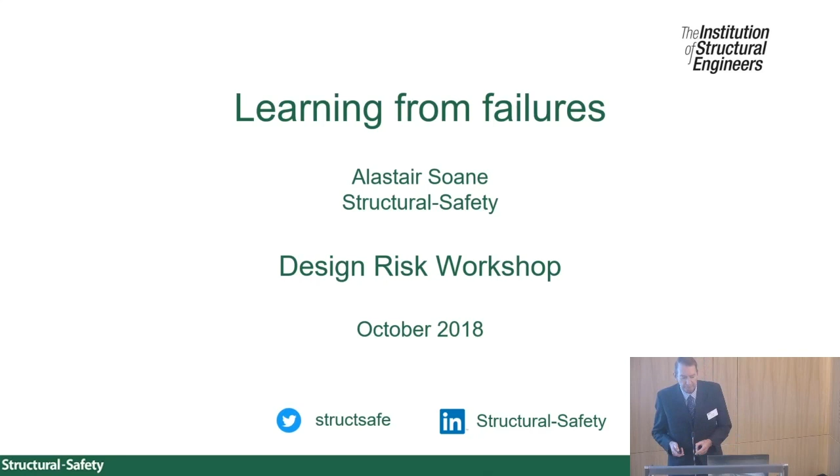We have three sponsors, who provide us with funds and guide what we do. Principal amongst those is this institution—they've always been very keen on safety. Second are the Institution of Civil Engineers, coming more into prominence post-Grenfell because of infrastructure concerns. And then, of course, HSE, which is absolutely fundamental to safety in general, and is the third leg of our sponsor. So we've got a very stable three-legged stool.

And that is the group. Just a minute, I've got the hang of this.

Underneath that comes structural safety, which is just a name, but the two bodies which really count are SCOSS and CROSS.

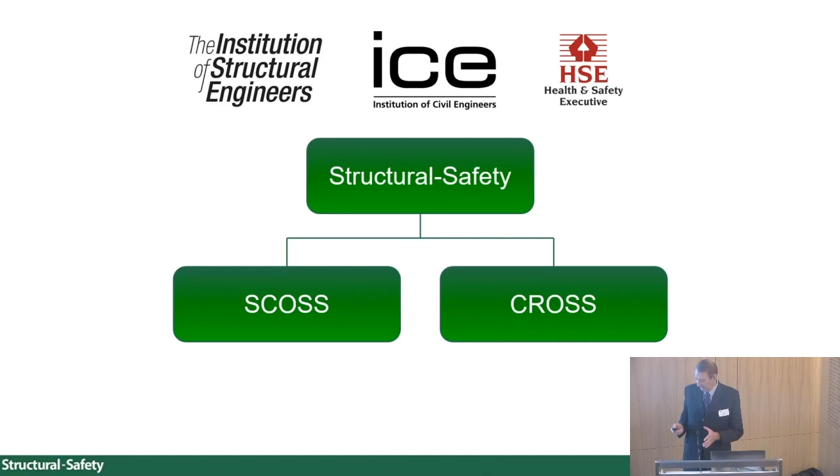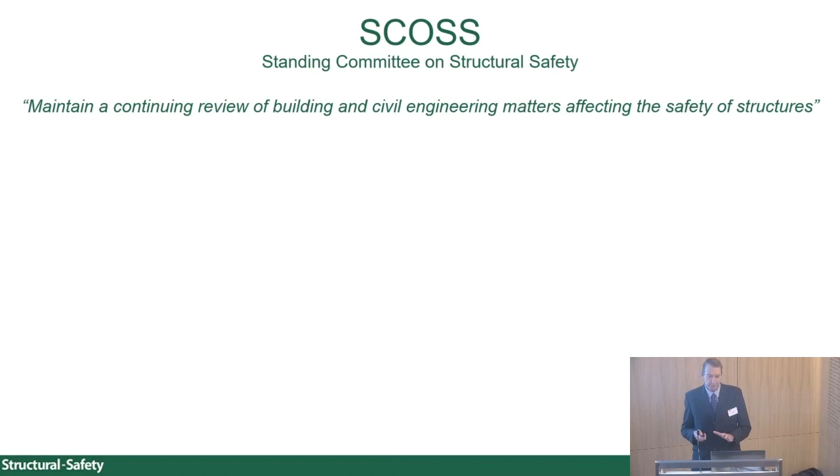SCOSS is the Standing Committee on Structural Safety. It's been going for over 40 years, started because of various disasters, including Ronan Point, a building which collapsed due to a small explosion, and bridges which failed as well. So SCOSS was brought into existence to collect data from public sources, because at that time there weren't internets, there wasn't immediate access to information, so you had to wait until something was publicised.

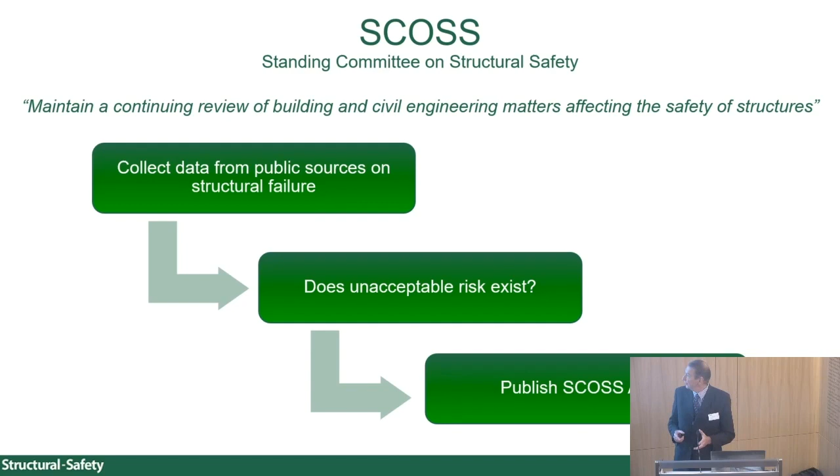SCOSS then considered, is there an unacceptable risk? Their duty at that time was to report it to the President of the Institution of Structural Engineers and the President of the Institution of Civil Engineers. Then, if it was decided there was a risk, an alert was published and went round industry. We still do that, and that's still important.

Here are some of the recent alerts we've published. This one on the left we'll come to again—fire in multi-storey car parks, when there was a huge fire in a Liverpool car park that destroyed 1,300 vehicles. A very important issue, and we'll come to why later.

Then there was a steel frame which collapsed in London. This was a building ready to be completed—it had been topped out, and minutes after 40 people left the site, it collapsed totally. So it was a near miss for 40 people. However, the building was intended for religious purposes, and the ground floor was going to be a hall, a congregation area where up to 1,000 people could have gathered. So it was possibly a near miss for something like that.

In order to create this big space at the bottom, they wanted no columns, so there was a huge girder at the top spanning right across, and the other floors were hanging from it. The reasons it collapsed are not entirely certain because the exact trigger wasn't found, but there were a lot of construction defects and issues, given in our alert, published in February last year.

Then there was the business of the Edinburgh schools, where a number of schools were found to have issues. It all started off with this school here. I'm trying to get a red button and I can't seem to—it's just below the two arrows. There's a red... oh yeah, right, thank you very much.

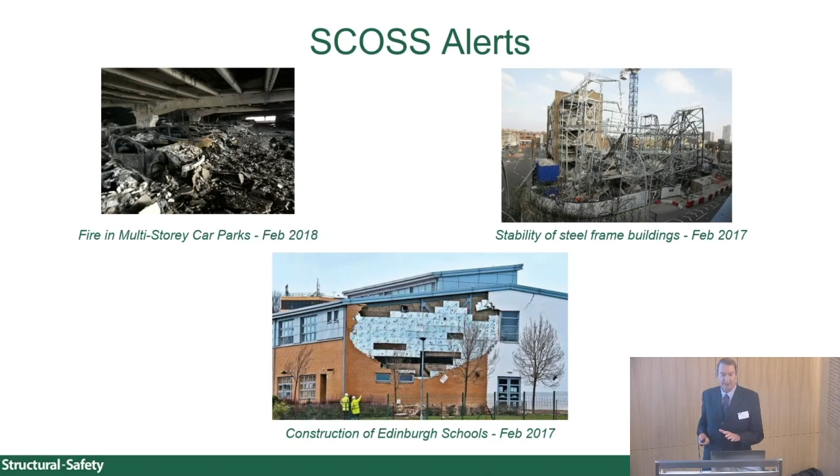The defects which were discovered were found to be endemic and covered a lot of schools, and you will find the details of that in the SCOSS alert. So we publish stuff very relevantly, and even in this day and age, in a highly regulated country, a highly regulated engineering community, we still get issues like this.

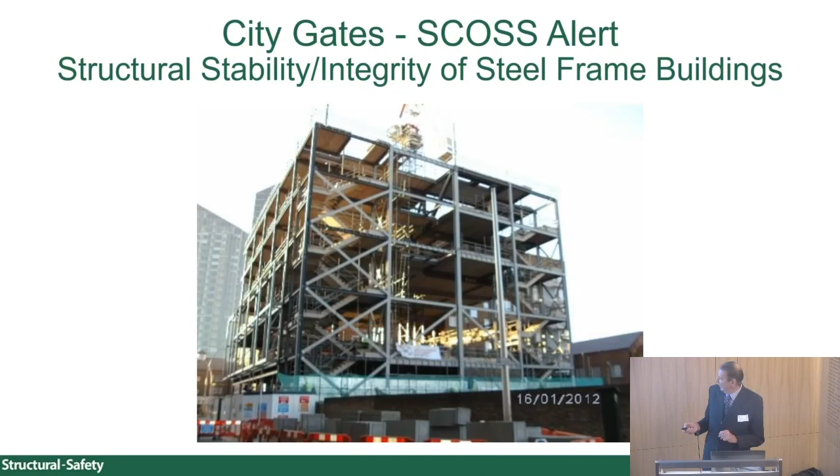So there's a little bit more about the City Gates building, photographed just after the topping out ceremony, and that's what it looked like afterwards. So a catastrophic sudden collapse.

And here are a couple of the reasons for it. One, if you imagine this being upside down, there should have been a hanger welded on, but obviously the welding didn't take at all, so the hanger just fell off.

This is part of a tensioned connection, and so there was a piece of steel coming down, another one coming up. The two should have married up, and bolts should have gone through the holes. They didn't marry up at all, so more holes were drilled in order to make it work. So you had what was in effect the edge of a postage stamp, which just sheared.

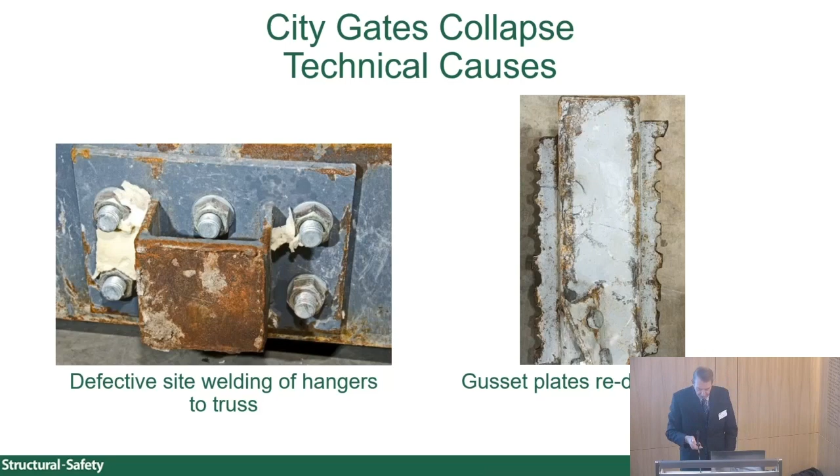So these are issues related to the fabrication of the steelwork.

So what we do is we try and learn lessons from these things. And there are various lessons here. For example, a local failure shouldn't cause a disproportionate collapse, which is an inherent part of robustness.

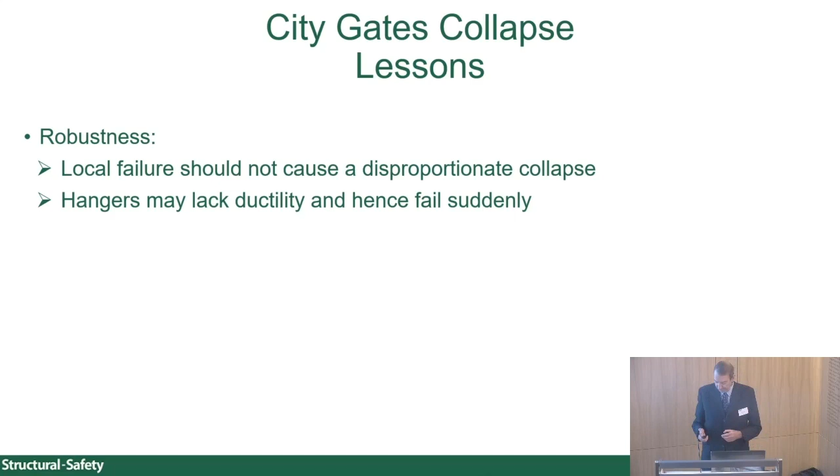Hangers are something which don't have much ductility. And if you're trying to avoid sudden collapse, you want to have as much ductility in your system as possible. You want it to kind of yield a bit. It can sag, but it shouldn't fall down. And this is a key point in earthquake engineering.

And connections, of course, are vitally important. And you should worry, for example, about welding vital connections on site. And you should obviously not amend a connector, such as drilling extra holes, until you've talked it through with the designer. I'm sure none of you do those things, but it did happen.

And the contractor should always be aware of the risks of an unusual structure. So if you've got something which is not run-of-the-mill, the contractor must be made aware, and everybody concerned, that this is a structure which has got special requirements.

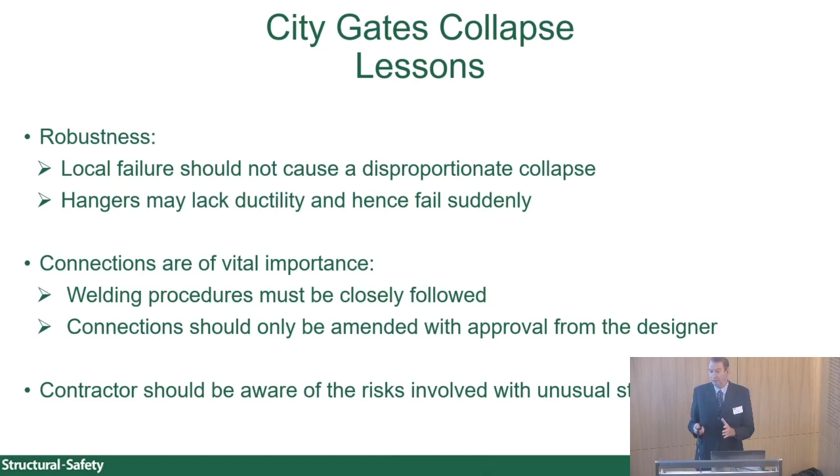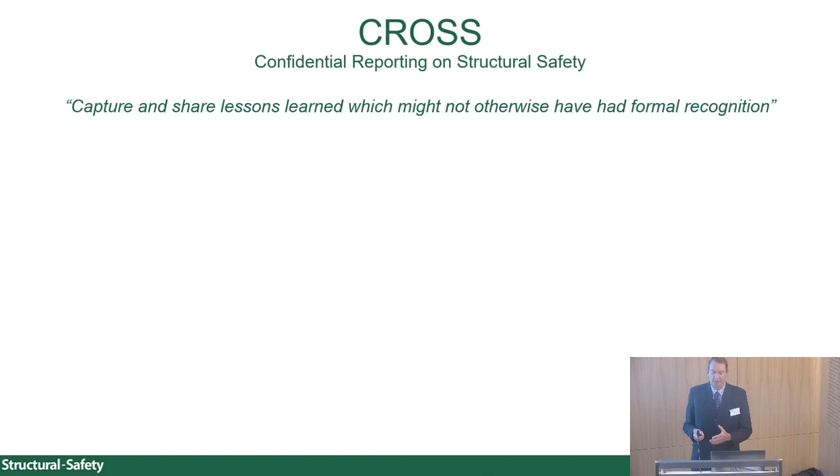So we now move to what does CROSS do, and Faith was very instrumental in this a few years ago, in deciding that there were lots and lots of events which happened but which never got reported. They weren't published for various reasons, and yet lessons could be learned from them if we could find a way of gathering that information and learning from it and disseminating it.

Now here is the process that we use, and we copied a lot of this from NASA, because 40-odd years ago there were a lot of aviation crashes in America. Pilots would come down and say, well, I had a near miss there, and the first thing their employer would do was say, okay, you're fired. So the Federal Aviation Administration, who were in charge of all this, decided that they needed a confidential reporting system.

A no-blame system. And in fact, in America, if you're in the aviation business and you report something and it's not criminal, you will never be prosecuted for that. So that's a kind of get-out-of-jail-free card. We don't have that here. But we do and have always worked alongside NASA to make sure that our processes and theirs are the same.

So a report is received. It only comes to me and our senior engineer called Paul McNulty. We're the only ones who ever see a report. And we've both got very bad memories, so after a while we never realise who it's come from. Because although we need a name in the report, we don't actually use that name ever. We simply may want to phone somebody or email them and check a few details, but in due course, that name is shredded from our system.

The report is then processed to produce an anonymised technical issue which doesn't mention sites or products or names of contractors or clients.

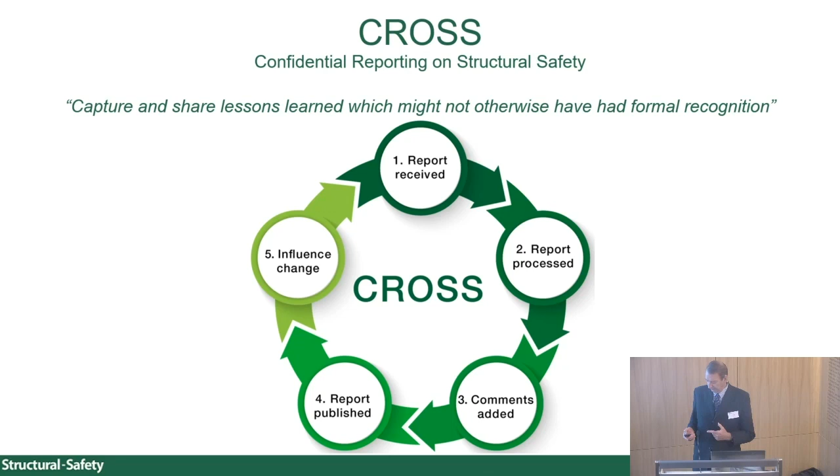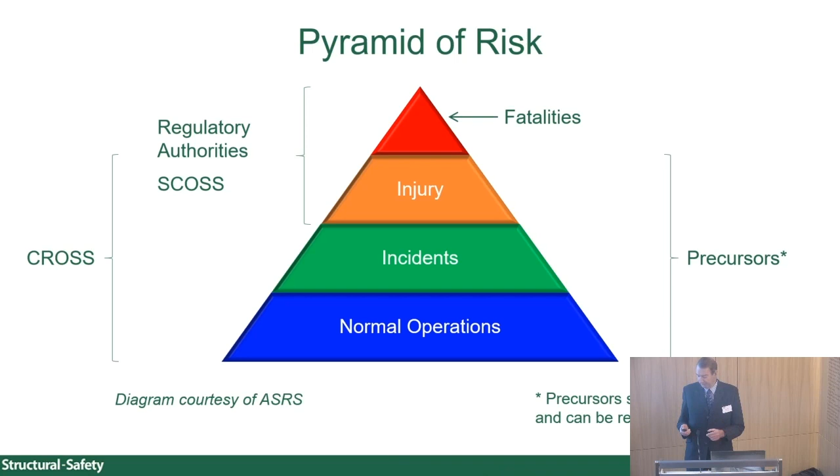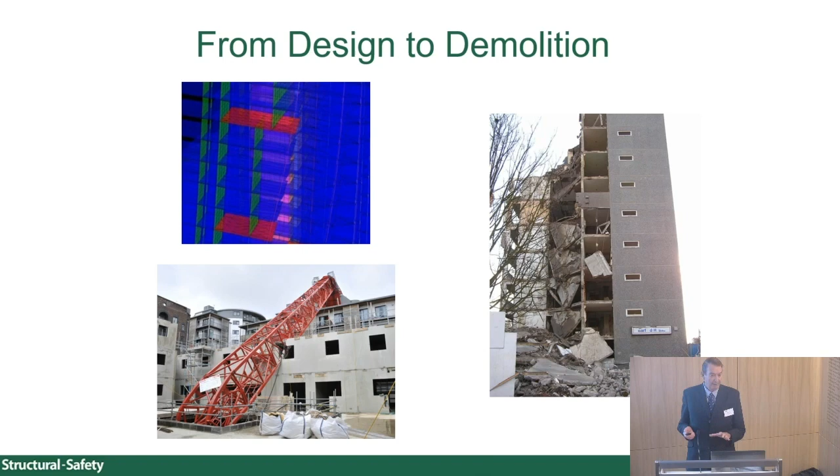Large panel structures are in the news again, being looked at post-Grenfell. So what sort of causes do we get?

We analyse our reports and give them a primary cause. This is, in a sense, simplistic because all failures have multiple causes, but there's usually a prime cause.

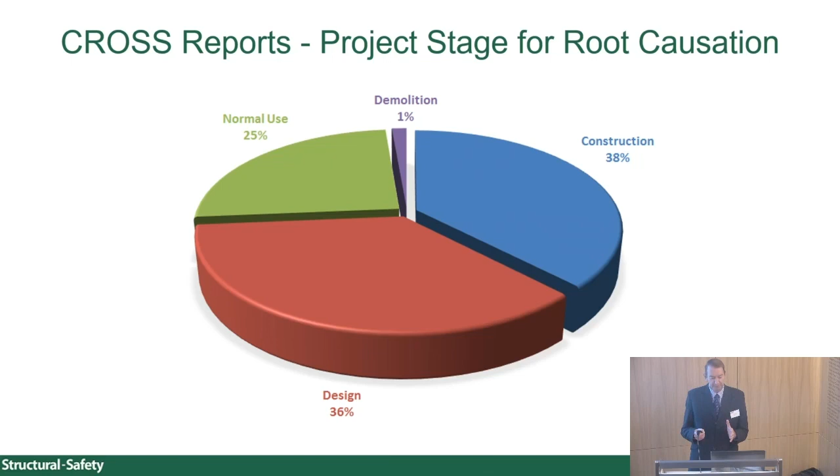There's not so many of those, but we think that's because not so many engineers are involved in the life cycle of a building. Once the construction is complete, they generally go out. So there are probably more failures in the green sector, but we don't record those.

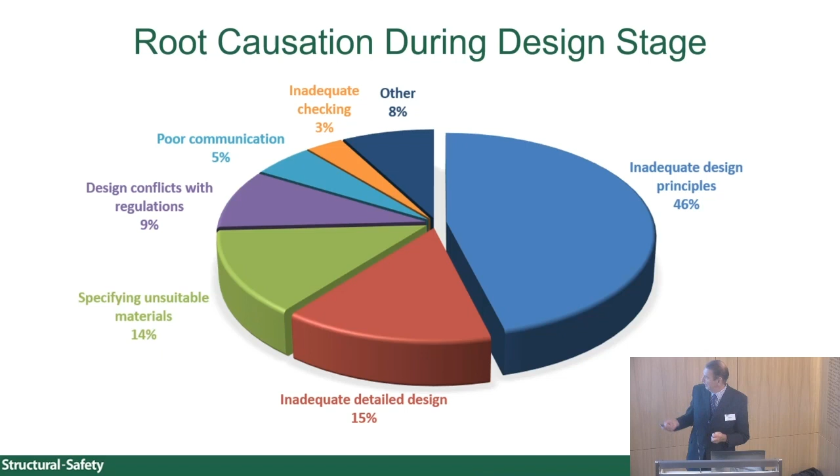We then analyse what happens in the design stage, and we find the biggest sector is inadequate design principles - people who are either not aware of or haven't thought of fundamental principles. Then there are other issues to do with inadequate design, inadequate checking, and communication and so forth.

During construction we can divide that up, and the biggest sectors are inadequate competency and inadequate site supervision. So the human factor accounts for 50% of all the issues which happen on site that get reported to us. I stress this is not necessarily a complete picture - it is what we see.

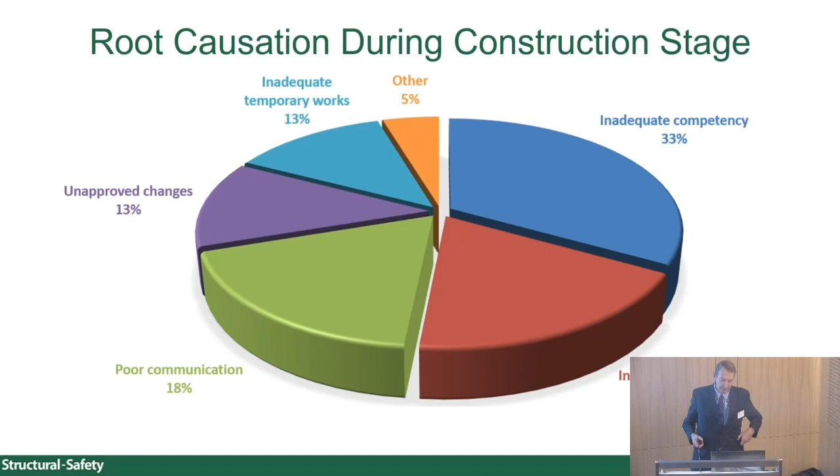So here is an example of looking at precursors - these are anchor failures. About 15% of our reports are to do with anchors and fixings.

They are often neglected. The designer will say connect X to Y, and it's left to somebody much further down the chain to decide we'll buy a fixing, and often somebody doing a bit of value engineering will say there's a cheaper fixing available down the road, get that one.

The picture on the right is of a ceiling which collapsed, and I always look up at heavy ceilings. This was in a cinema for heavy acoustic insulation - 50 or 60 mil of plasterboard, with speakers, lights and various bits of gear up there. Yet the fixings which failed, these skinny bits of wire, were the kind of thing you would put a very light suspended ceiling up with. So no thought was given to what was going to hold that ceiling up.

No casualties, fortunately. This is an example - you can see all these bolts going in at skewed angles. These were bolts holding angles, and the angles were holding up the precast stairs in a multi-storey block of apartments.

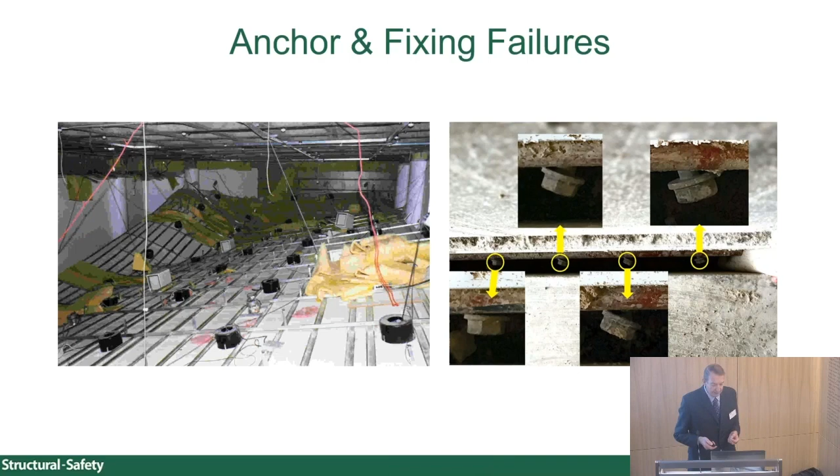Putting the bolts in meant they had to avoid the rebar, but they couldn't avoid the rebar. They put the bolts in any old how, and the result was like that. So again, it was a near miss, because nothing happened.

But here are some examples of failures where chemical anchors have caused near catastrophes. The one at Balcombe Tunnel, the Victorian tunnel, has steelwork above which is part of the electrification system. It's ancient brickwork, but still trains go through there on the way from London to Brighton at 100 miles an hour. You can't really see it, but that steel platform is sagging because the bolts holding it up, which were into the masonry, have fallen out.

They've been falling out for years. Inspectors have been going along, looking at the tracks and kicking these things, saying 'oh, there's another bolt, I wonder where that came from,' and never looking up. So that was a near miss.

One which wasn't a near miss was Boston, where heavy ceiling panels connected by epoxy bolts to the tunnel roof collapsed. There were fatalities, and that became known as the dollar anchor, which caused the billion dollar claim.

Huge problem. Then in Japan, a very similar thing, the Sasago Tunnel, where there were concrete components forming a flat roof and air ducts above them. That collapsed because the bolts were inadequate - they had never been inspected, never been checked. In that case the collapsing panels caused a fire, and quite a number of deaths followed.

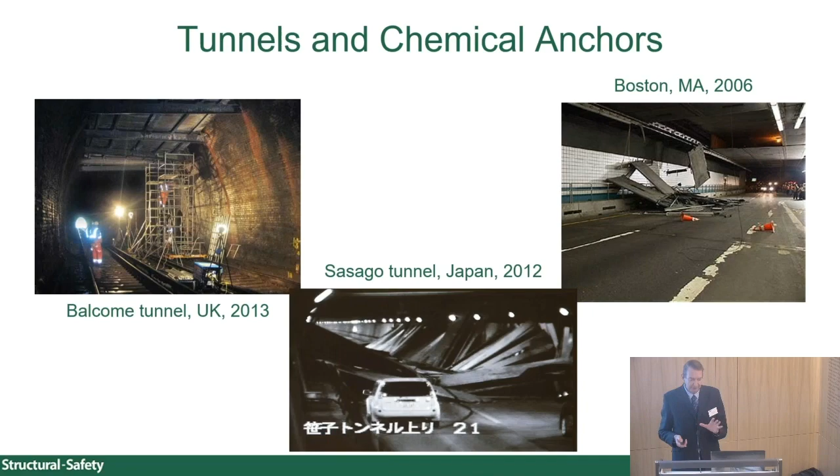So a simple thing like a fixing - and if you can find the precursors, you may be able to do something.

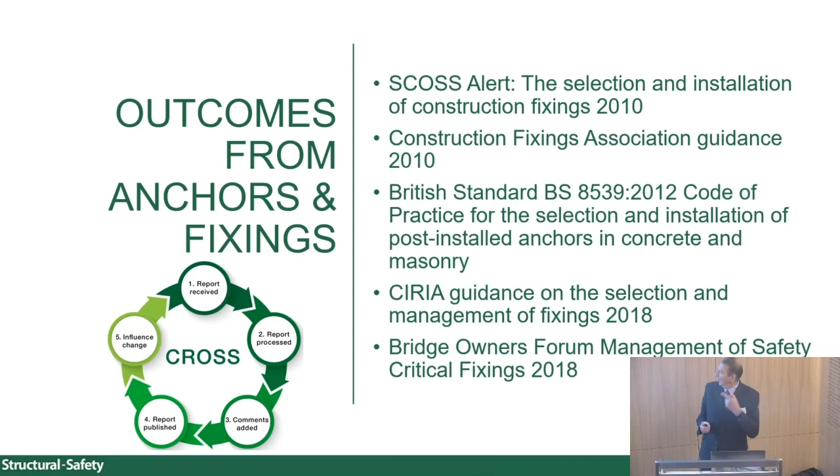So here's what we were able to do. We published an alert back in 2010 about these things, and published guidance along with the Construction Fixings Association, the trade body looking at fixings generally. The British Standard Code of Practice was changed using our material. Then this year, CIRIA have published new guidance, and the Bridge Owners Forum have published new guidance for all the fixings related to major bridges. So our virtuous circle has been completed.

Here's another issue which is relatively common: balcony failures. That is a building with balconies at 2 levels. The higher level balcony has just fallen on the lower level, been there for 40 years, and the rebar was found to be in the bottom of the slab, not in the top. So people have been walking on this quite happily as a cantilever which was completely unsound.

The photograph in the middle I can't show you for legal reasons, but it's a very similar case in France recently where 6 people were killed when a balcony fell down due to the rebar being in the wrong face.

And then this is one in Berkeley, California. That's timber which sticks out, and there was a party being held on a balcony at a student residence, and that came down, and 6 students were killed in that. So just simple balconies can create problems.

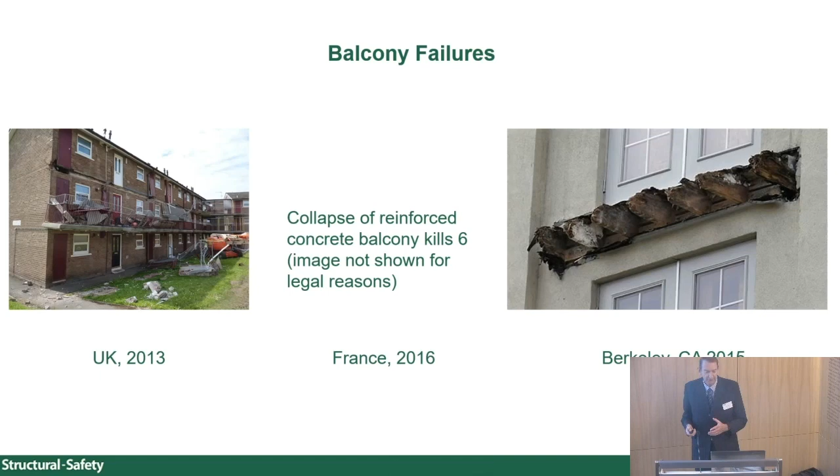So what are we doing here? We've had 21 reports, which is a significant-ish number. We're preparing a report. There is a committee, British Standard Committee, looking at balconies now, so that has been submitted to them as evidence, and we'll see what happens.

Temporary stages. The one over here is a small stage for a small event, and it's got a roof which is fairly simple, but it's got some mass to it. It's got some very heavy speakers in the corners. So in earthquake terms, it's an inverted pendulum. All the mass is at the top, and all that's holding it up are scaffold tubes at each corner.

So the reporter who sent that in said, well, I'm a bit worried about this. What's holding it together? The one on the right came from another reporter at about the same time, but coincidence.

And that was somebody who had been checking a temporary stage at a site for a concert and found that the corners of the top of the stage were connected to the ground by strops, and at the ground were large water tanks. So the idea was these water tanks would act as kentledge, and if there was any swaying of the temporary stage, then these water tanks would stop it. But their concern was, well, water's not very good - what if somebody just opens the tap, for example?

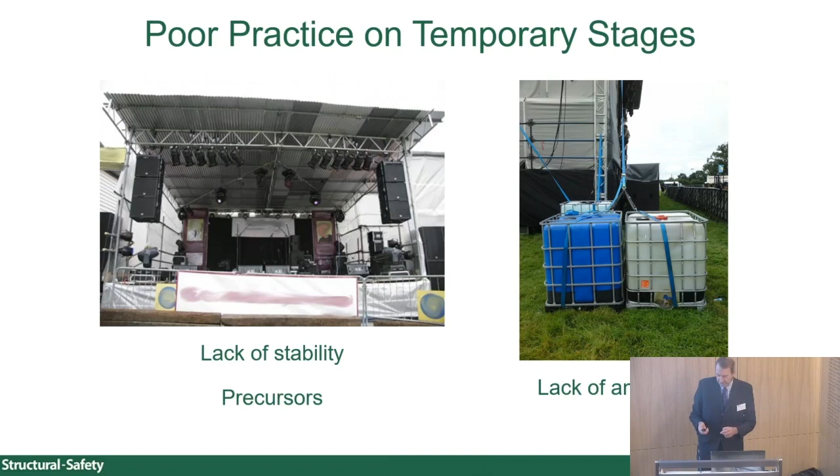So I wouldn't imagine people in Indiana would be reading SCOSS Alerts from earlier, or SCOSS reports. If they had, somebody might have thought more deeply about this.

So what are the outcomes from temporary stages? We published an alert. That alert was used in the London Olympics, where there were more temporary seats than permanent seats, so all of those were checked in accordance with the principles that we had proposed. And finally, guidance from the institution has been updated in 2017 on the procurement, design and use of temporary stands. So again, we have completed our virtuous circle.

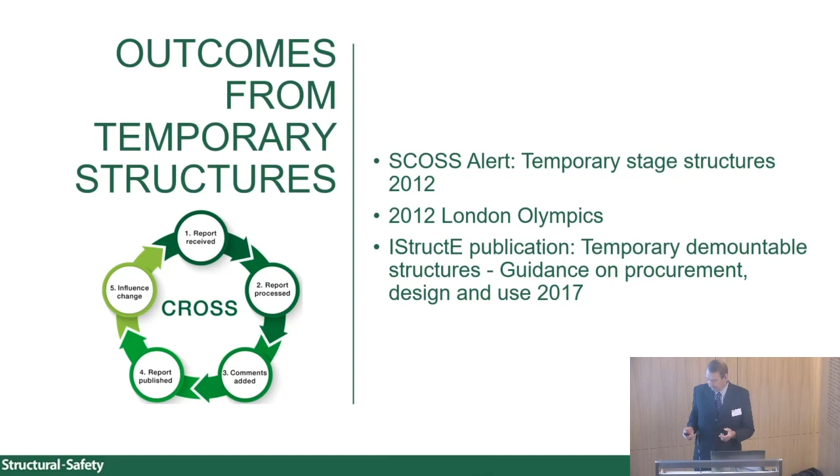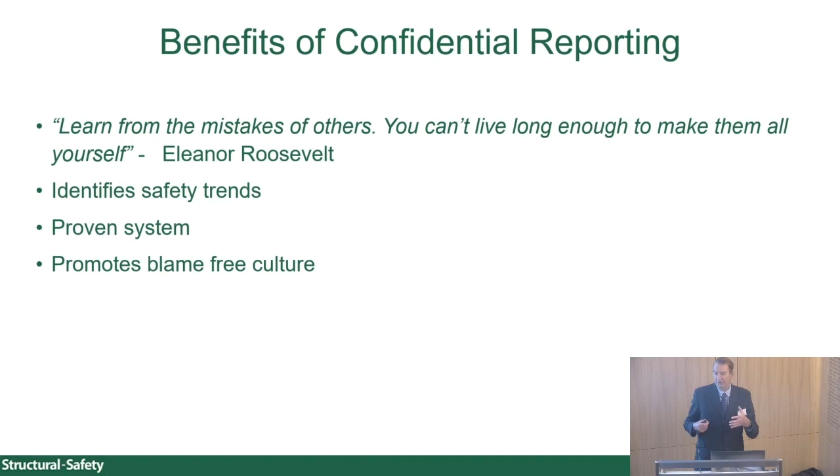It's a proven system. It's been proven by the aviation sector, and we've been using it for 13 years, very satisfactorily. It promotes a blame-free culture, and this is important because lots of inquiries into why something went wrong say, well, let's find the scapegoat - who's responsible for this? And that's part of the culture of blame, isn't it, in the country? If something happens to somebody, you say, well, there must be somebody to blame. We don't do that. We're purely interested in promoting the technical lessons which can come out of it.

It's independent - although we've got our sponsors, the sponsors themselves don't tell us what we can say in our reports or alerts. And we act in your interests as well, because there is nothing worse in your career than getting involved in a fatality on a site or in relation to a building.

It destroys people's lives, it destroys firms, it is an awful business to get into. You would worry what letter is going to come through the post next, what court you're going to be called to, or whatever. So it's really worthwhile avoiding, making sure you never get into a situation where you might be involved in any way.

It also helps the industry, because companies which have been involved in bad events often go bust - it can certainly affect their reputation hugely. And ultimately we want to protect the public, because that's one of the requirements, one of the ethical considerations of what we must do as engineers.

This is very important for you - we always need reports. This is the oxygen of our system. We don't get reports, we can't function.

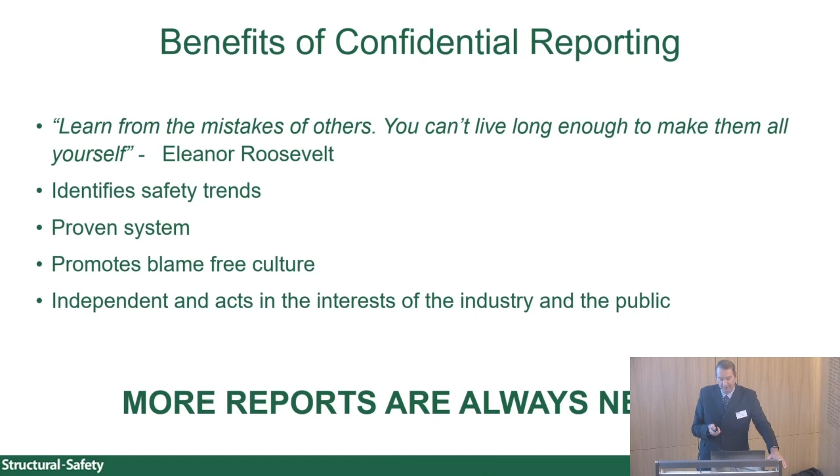So you will all have had events which you might be able to report. You can just go onto our website, Structural Safety. There is a form there, and you can send the reports in, and they will be dealt with in the way you've seen. So please think about that, and I will look forward to a spike in reports coming in the next few days. It's very serious.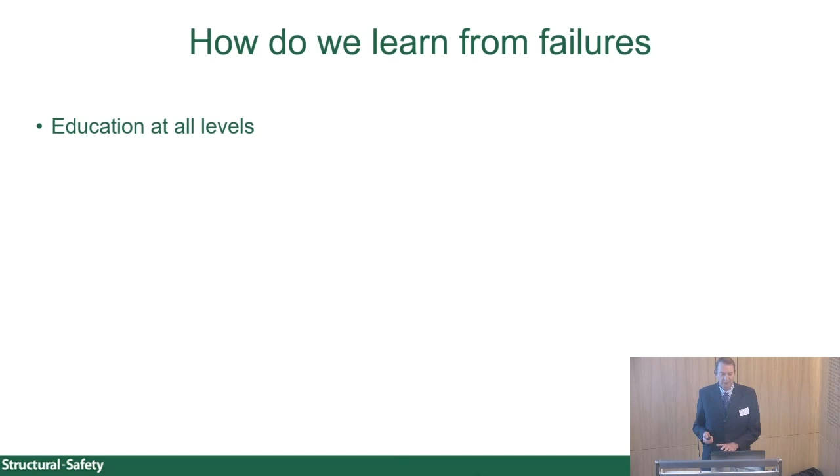Right, so how do we learn from failures? Of course, that's one of the things this seminar is about. And it's education at all levels - ultimately, learning means education.

You'll get information condensed by others, and that will include codes, guidance, institution publications, and the like. So somebody else has looked at all the things that have gone wrong and incorporated those into advice which you can read. It's obviously easy now to Google something and see what you get from that,

but be very, very aware of fake news. And if you should ever be called upon to go into a court and give evidence as a witness, and you said 'well, my lord, I got it off the internet,' that will not go down very well. It's not regarded as a secure source for information. So it's very useful, very interesting, but don't just trust it on its own.

You can follow what we do, and that will give you information on a fair number of safety issues. And look for patterns - pattern recognition is critical. And pattern recognition is what, at this stage, artificial intelligence is about. Not really intelligent, it's looking for patterns and things.

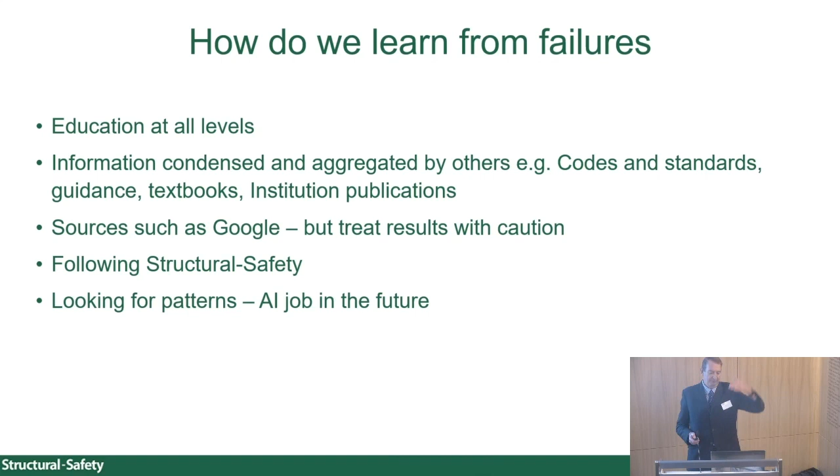So if you see a pattern, that can be a warning of something going wrong. But it's something we think AI will become very good at in the future. And AI related to BIM is another sector for the next generation, probably for people like you. And then keep repeating the reminders, keep telling people, keep giving talks, keep pushing the lesson through.

So let's move on now to tragedies in tower blocks in London. It's absolutely awful, isn't it, that in one of the world's major cities we should have had two tower block tragedies. We've talked about Ronan Point.

It's up there somewhere, where the minor explosion took place. There was mains gas in the building. A lady was going to make a cup of tea. There was a fault, an electrical fault. There was a minor explosion which blew out a wall panel. The wall panel then allowed the floor panel above to collapse, and so on. So that was a progressive collapse.

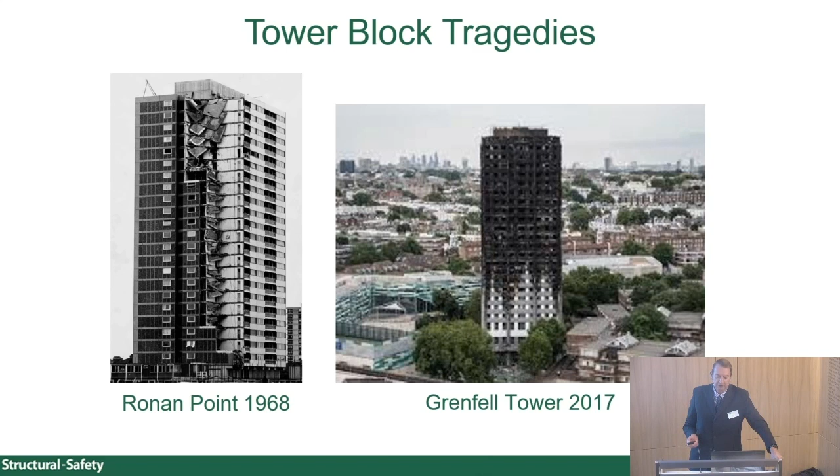And then, of course, there's Grenfell - an absolutely shocking event. Now, we can't talk in much detail about Grenfell, but I can give you some information because it's under a legal procedure at the moment, and a judge is looking at all the issues.

But there are certain parallels we can draw between Ronan Point and Grenfell - lots and lots of issues. In both cases, change has resulted or will result. Ronan Point changed the way engineers worldwide dealt with robustness, and things are much better connected now than they were. You can knock out a floor panel or a wall panel, see a local failure, and you will not get a progressive collapse - unless, of course, you're in that steel frame in London we were looking at.

Grenfell will change our attitude to risk, and it will change our attitude to regulations. And in both cases, the designers, the constructors, the managers, and the ownership have all been involved in some way with what has happened.

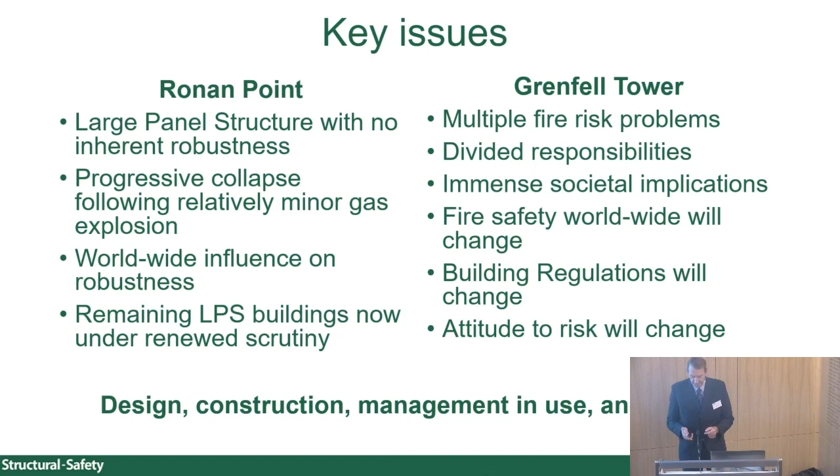So what did the government do? Well, they set up this inquiry under the judge, and that is taking place, and it's absolutely harrowing to see some of the stuff.

I was at a meeting yesterday in the House of Commons when the MP for Grenfell was talking to us about what has happened and the awful stories that come out of it. She looked at us, a bunch of older white people, and said, what have you got in common with the fatalities at Grenfell and the survivors? But that's what we are. At the moment, we're the sort of people trying to resolve those issues.

Then they set up an independent inquiry under Dame Judith Hackitt, who is very well respected within the industry. She has led a team to look at what is the future for regulation and what is the future for fire safety following on from the Grenfell Tower. We were involved with that, and we'll come to that in a moment.

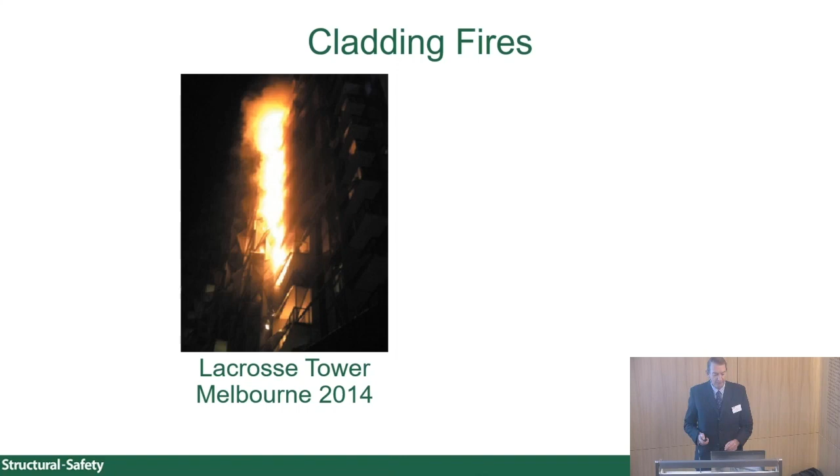But let's look at precursors for cladding, because cladding is one of the primary issues under investigation at Grenfell, but it's not the only issue, and you will see more. There was a cladding fire in Australia, and one in Dubai. So those are precursors, but people said, well, this can't happen here, our cladding systems will comply with the building regulations, so we couldn't possibly get anything like that.

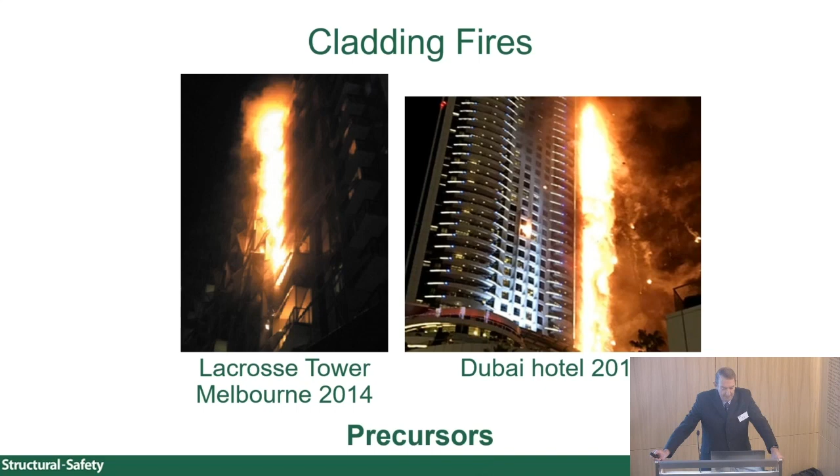So the plastic on the outer layer is very combustible. The calorific value found of that composition is the equivalent of the calorific value of diesel. So imagine putting a thick layer of diesel around a building and saying, well, that's going to be okay.

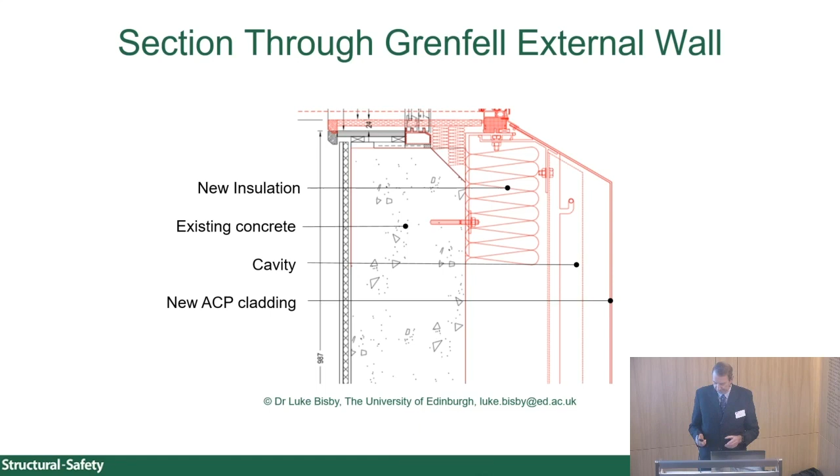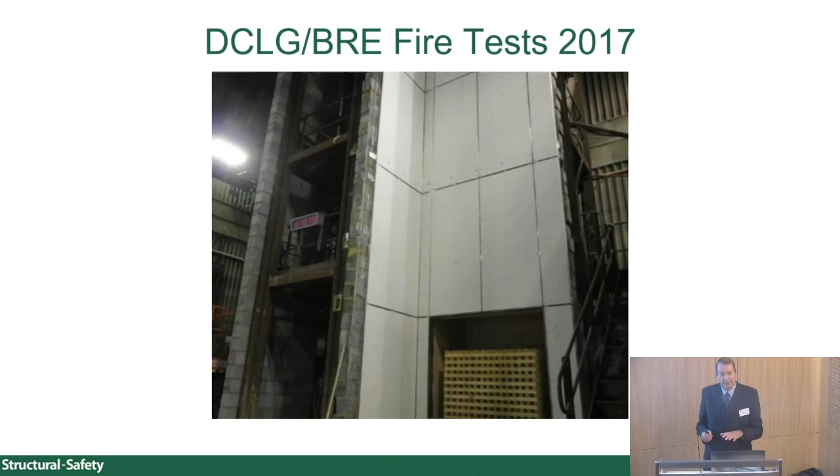Now, the BRE and the government department did some tests. This is a pretty standard test, whereby you build a section of wall panelling with a re-entrant corner. There is an opening down here that simulates a window or door, and inside is a crib of timber with a known calorific value, so if you set that alight, you'll get a known fire strength capacity.

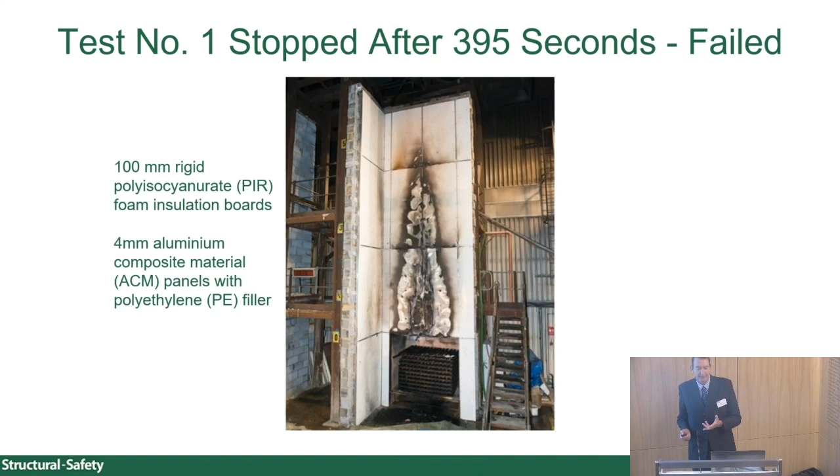Now that was with the Grenfell-type cladding. The fire was stopped after 395 seconds because it was totally out of control - it had to be put out with liquid nitrogen. You will see that the crib down here is hardly even blackened. So it caught fire, it set up the cladding, and there was a total failure in terms of the British standard.

Here is one done with non-combustible rock wool foam insulation and an ACM panel, same thickness as before, same aluminium, but a fire-resistant inner plastic membrane. You will see here that the crib has been completely consumed, so that has passed the test. After 1 hour there is some damage, sure, but it's not catastrophic and could be contained.

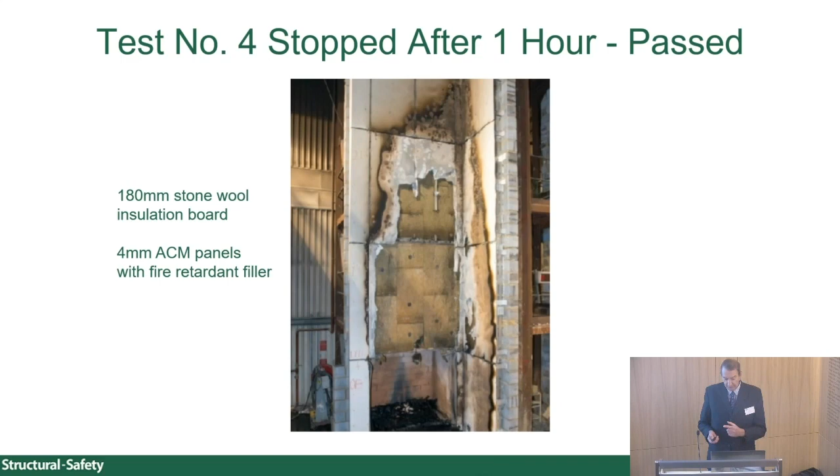So that's one catastrophic fire. Here's one which didn't result in life loss, but easily could have done. This is a Liverpool car park, and this is the Liverpool arena, this is its car park. There was an event taking place on the 31st of December - in here it was a horse show.

So the arena was just filling up, the car park was full. There and there are apartment buildings, the one on the right only 5 meters away from the car park. Down here there is a high-class hotel. So the car park was in the middle of residential areas.

A car on the 3rd floor caught fire - this is all on CCTV. The fire brigade were called quite quickly, but by the time they got there, the fire had spread to adjoining vehicles. It then spread so quickly within the building that it couldn't be controlled.

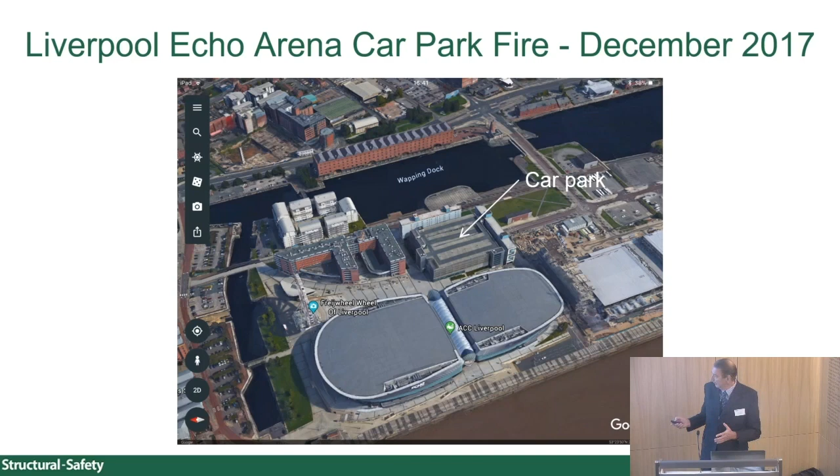Going back to our site here, this is a dock. Only by bringing in 3 very high capacity pumps and putting them under the dock was enough water obtained to prevent that fire spreading to the other buildings. The mains in the street were totally inadequate, so if the fire brigade had to rely on those, the fire would undoubtedly have spread to the apartment buildings and possibly to the arena as well.

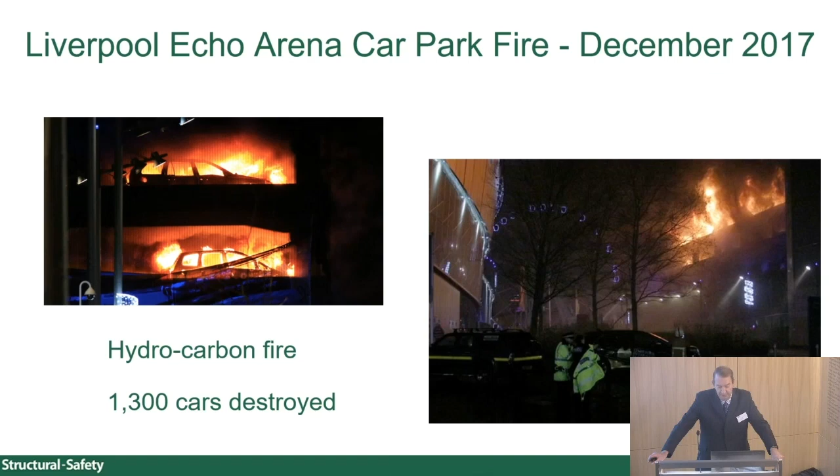Now, people got out of that, and here's a plan of the building. There were fireproof cores in the corners, and it's a usual array of parking spaces and ramps. Cars were abandoned on the ramps, people fled from them, got out through the fire doors into the escape stairs and away.

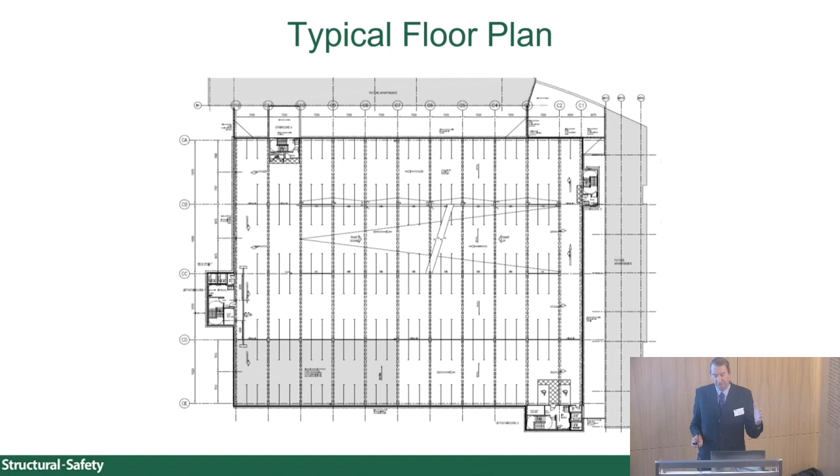You'll have seen stuff about fire doors at Grenfell which performed exceedingly poorly. These fire doors performed tremendously - there was this inferno inside, but afterwards the inner layers were completely charred while the outer layers were fine, so it did a terrific job.

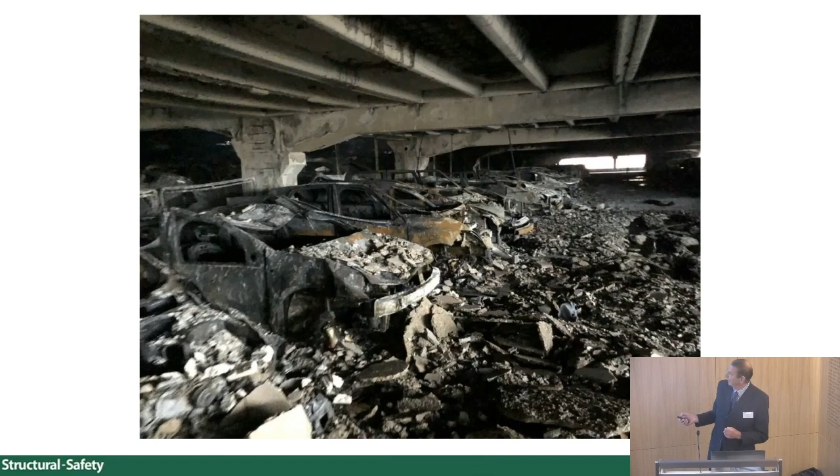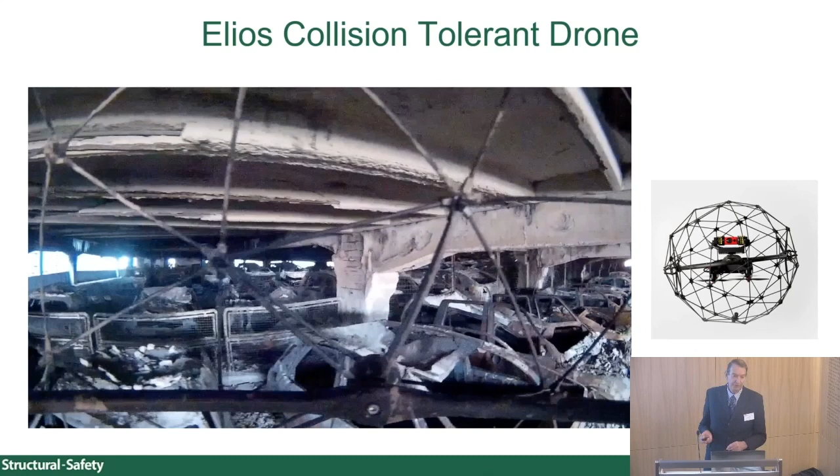This is another view. We were able to secure the services of a drone company, and they had produced a device which came from Switzerland called an Elios, a collision-tolerant drone. This was great because it's surrounded by a carbon fibre cage, and we were able to photograph inside the building using this. The insurance companies later went in with traditional drones, and they've lost two of them so far.

So here's a lesson from fires, perhaps, and this isn't usually talked about at all, but is there a calorific load case in your building? Is it necessary to consider that? The calorific fuel load in Liverpool was equivalent to a full tanker full of fuel.

And as I say, at Grenfell, it's equivalent to coating the building with diesel. So, high calorific value. Are the means of escape secure? Is there enough water? Can smoke and heat get through barriers? And is the structure robust? All questions which we have all probably thought about in the past, but have been brought to light by these big fires, and we don't want to see another one.

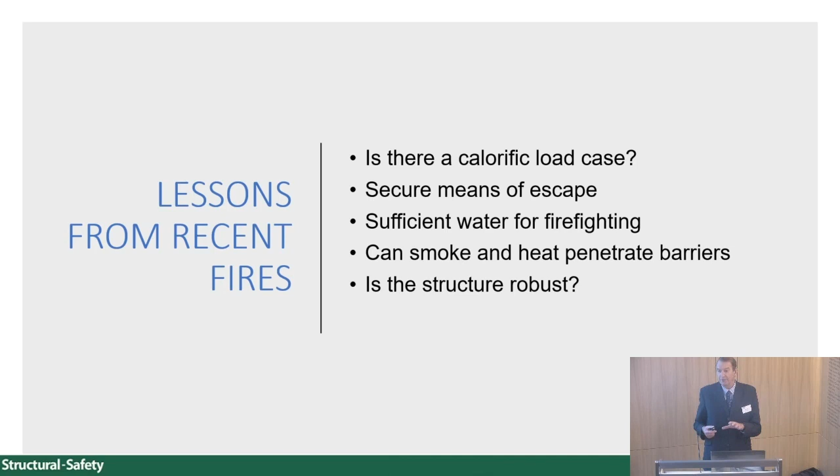Another guy I was talking to yesterday was an extremely important fire chief, and he said he dreads waking up every morning and seeing on the news that there has been another big fire somewhere.

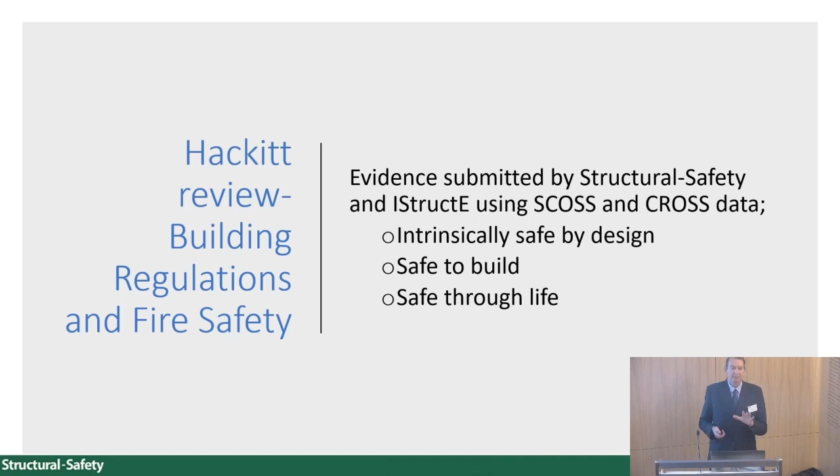So, what did we do in terms of the Hackitt review? Well, we submitted evidence that said buildings must be safe by design, safe to build, and safe through their lives.

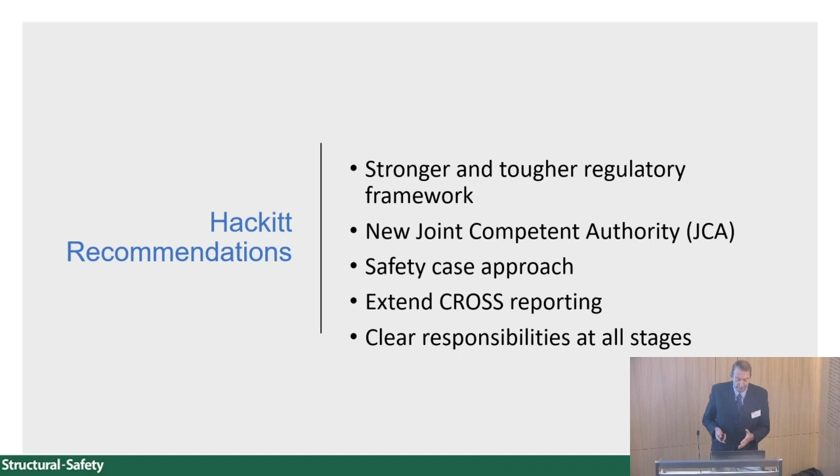Judith Hackitt's recommendations are for stronger and tougher regulations, and a new joint competent authority. This is for what are termed HRRBs, higher-risk residential buildings, but it may spread to all buildings. The joint competent authority is the Health and Safety Executive, local building control, and fire services. There's got to be a safety case approach, we'll come to that in a minute, further CROSS reporting, and clear responsibilities at every stage.

So safety cases mean, in terms of Hackitt, that there are a lot of gateways before you get to a problem, and then there are a lot of things to consider in mitigation should that problem occur.

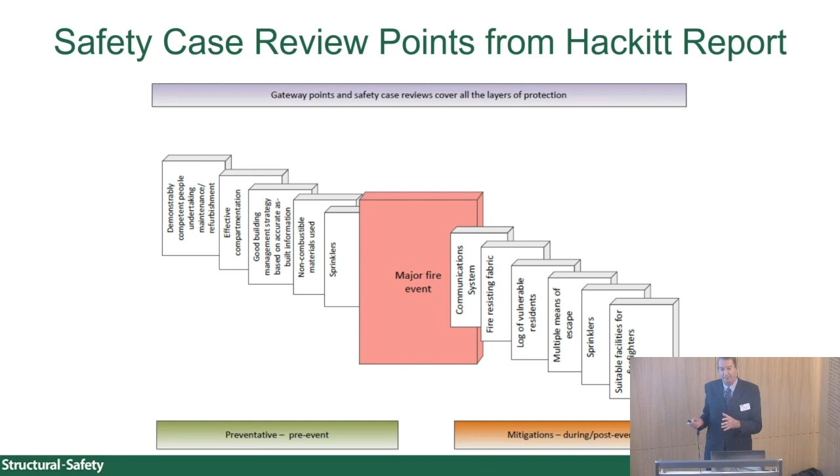A slightly different safety case approach, which you may get involved with more in the future, is to start a process by asking: are there hazards, failure modes, and possible consequences? That's where you think about things laterally. You look for problems, identify them, and think as widely as you can.

Then you prioritize those by significance, by what's actually likely to happen. You eliminate those by good engineering, which is, of course, part of a CDM process as well. Are they as low as reasonably possible?

And then, when you're actually on site, you want to confirm all the things that you thought were going right. If you thought that something was fire resistant, is it? Do you have a certificate to prove it? And is that certificate valid? If you thought your concrete was of the right strength, do you have the test certificates to prove it?

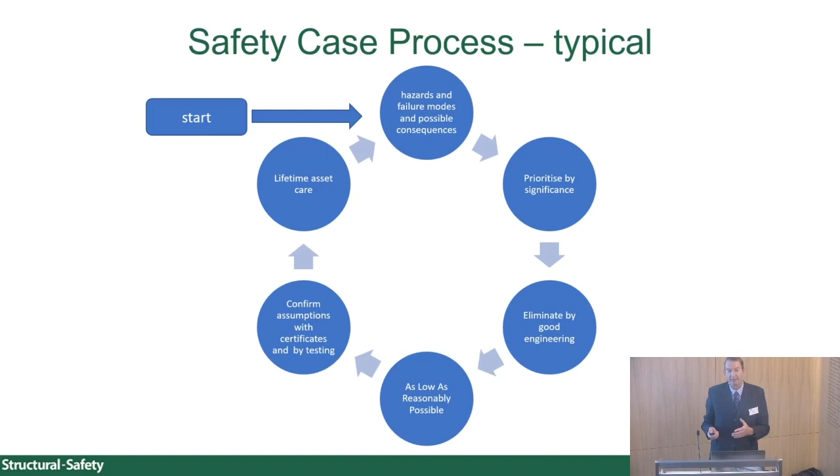And so forth. Then you look at lifetime asset care, and that's the bit which probably was being missed a lot of the time. As designers, we often stop at that stage — well, the designs are there, built, finished, handed over, and we pay no attention. But we should be thinking about the lifetime care of that structure, of that bridge.

Then, at the same time, the Institution of Civil Engineers got Professor Peter Hansford to review the infrastructure risk. And he found that whilst the risk of a major failure is low, it's not low enough.

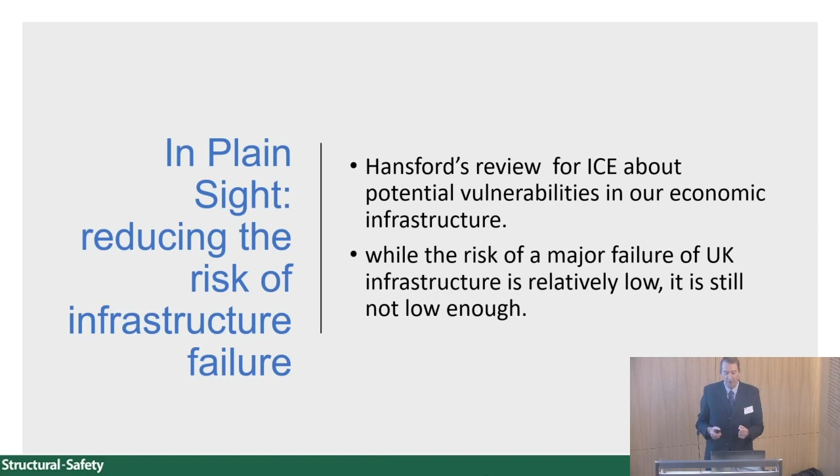So what did he recommend? A very similar process, lines of defence for risk management. He too has recommended that our work should be built upon by the industry, that we should learn more from near misses, that CPD regimes are going to be overhauled, both in this institution and in civils, and that we should all work together on lifetime safety.

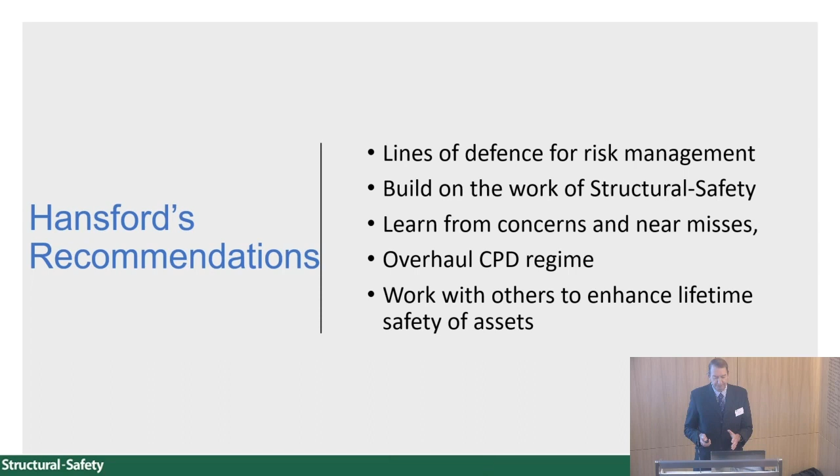It's very similar to what Dame Judith Hackitt said, but she was talking specifically about tall buildings. Hansford is talking about big bridges, railway lines, and the like. And there's their Swiss cheese model, similar to lines of defence: you say we've got lots and lots of holes in everything we do, whether it's a concept design, a detailed design, the drawings, the construction, or whatever.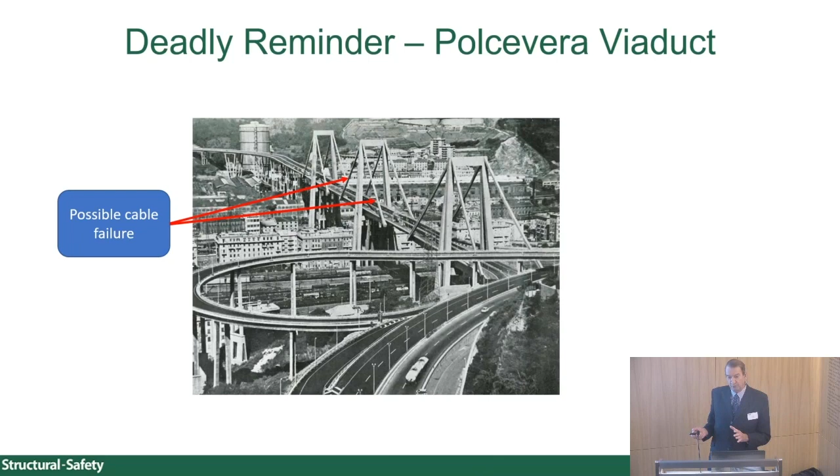The Highways Agency here have been looking very carefully to see whether or not we've got any bridges of a similar type. They've concluded that we haven't, but nevertheless a very close watching brief is being kept on what's going to come out of that. That will be the subject of a SCOSS report in due course when it is published.

So, what are the likely consequences? One of them is that there will be changes to the building regulations, more rigorous processes, including these safety cases. Everybody is going to be more competent, and Judith Hackitt produced the idea of a golden thread.

Now, this isn't golden and it's not a thread, but she said you've got to take the client at one end, you've got to go through the design process, the construction process, the observation on site process, the handover, and so on, and you come right back to the client.

Only when all those are connected together and kept connected together have you got a really robust system. Because it's systems that she's talking about, not the detail, but the whole system which is flawed and needs to be revised. So think about the golden thread all the time.

Pass on what you know to somebody else and make sure that what people before you have discovered is passed down to you. And of course another thing at the very bottom of that is digital records of everything. It's going to be boom time for BIM.

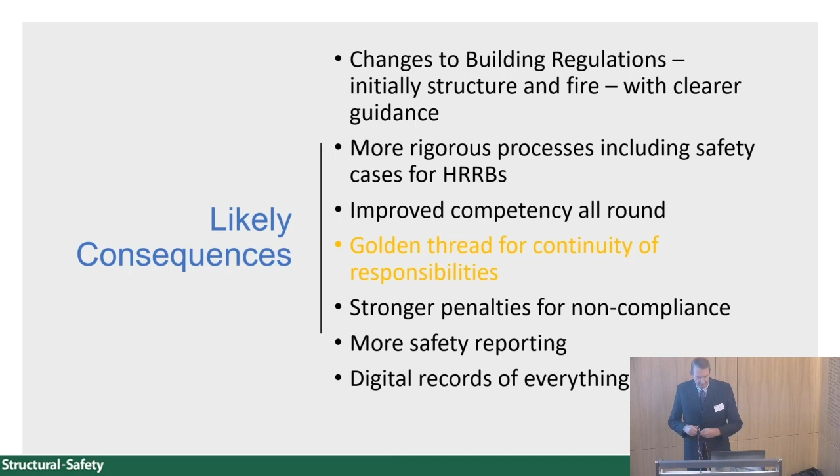So, what's the likely impact on our profession? It's those things we've talked about: greater awareness of risks, safety critical things, more competency, and more engagement probably in site processes.

There's been far too much of forgetting what resident engineers do and not looking carefully enough at what is actually being built. Is that what the designer thinks is being built? And in cases like Edinburgh, like the other collapses, it's not.

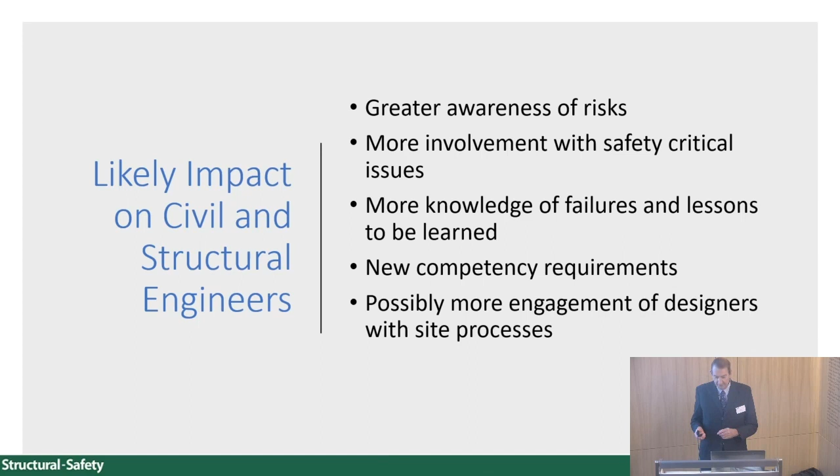So, coming to the end now, what you should be doing is some reflective thinking. Reflective thinking is looking at known risks and unknown risks. There was an American Secretary of Defense who was very famous in a war scenario talking about the known knowns, the known unknowns, and the unknown unknowns.

What you're looking for in real risks, you're looking for the unknown unknowns. What might happen that is just kind of on the fringes of our imagination.

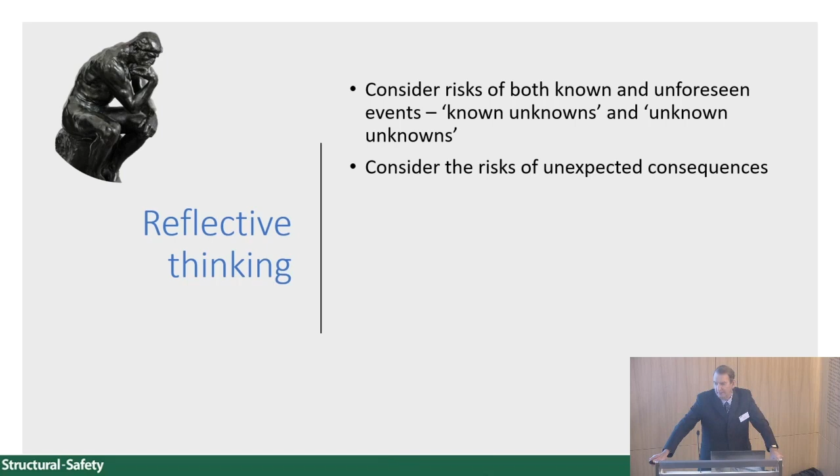Consider unexpected consequences. A small bolt failing on a bridge handrail may result in something falling onto a railway line and hence precipitating a derailment and a catastrophe. It happens.

Be very wary of new materials, new forms of construction and emerging technologies. They will all work, but you don't necessarily want to believe them all at first. You want to be wary.

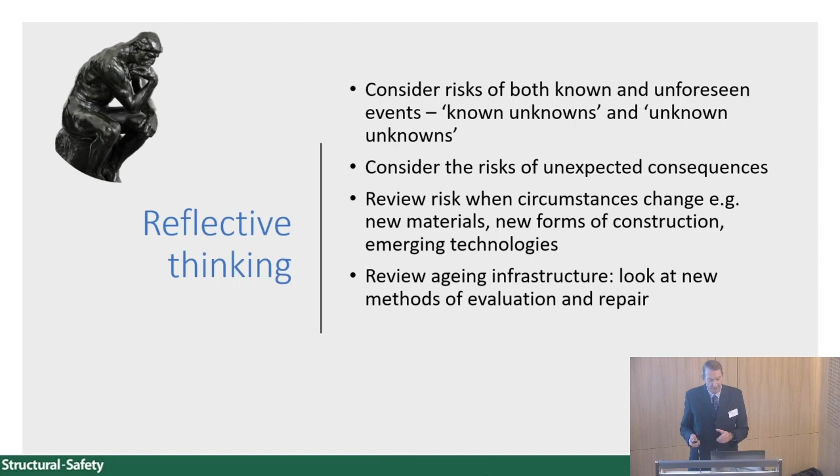Look at ageing infrastructure, because almost all our infrastructure is ageing in this country, and look for new methods of evaluation and repairs, things like drone surveys, repairing with carbon fibre, intelligent bridges, if such things can exist. And release safety critical information.

So if you know of something, report it to us or some other means. Make sure that other people know about it so the lessons can be learned.

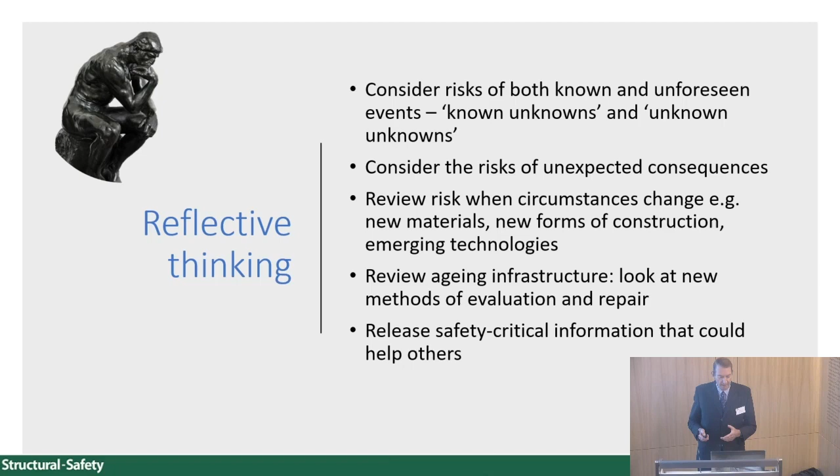And finally, we have got an international version of CROSS coming up. Faith was in Australia a couple of weeks ago and launched it there. We are working on CROSS in America and Germany and Southern Africa, and in due course other countries.

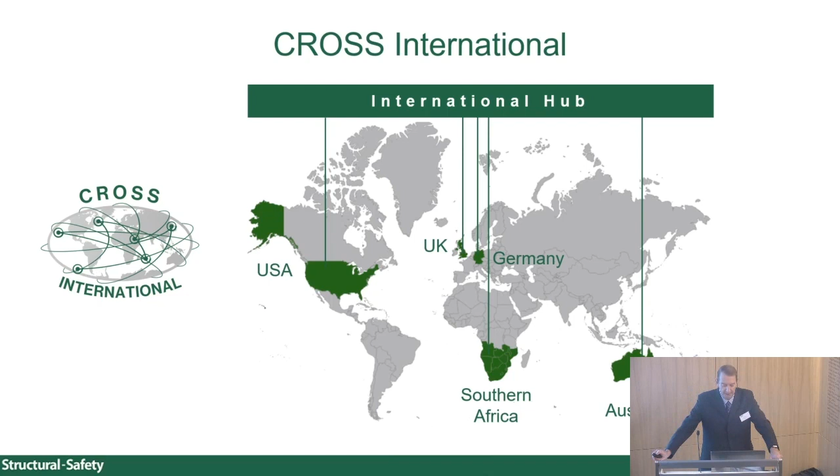We hope to have a network of CROSS systems across the world with a common data hub into which everybody will put their reports and their advice, so that people throughout the world, and particularly in developing countries, have got a resource to go to, to find out things that might help them avoid collapses and problems elsewhere.

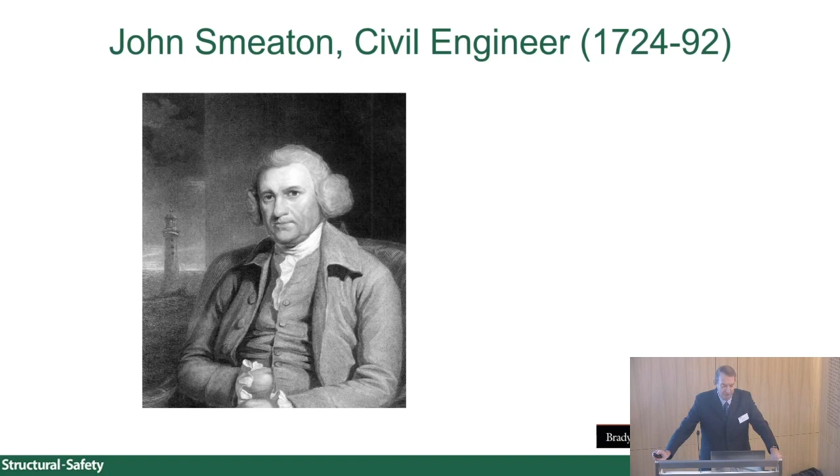And finally, to a guy called John Smeaton, who was the father of civil engineering. Before that, all engineers were military engineers. He was the first man who called himself a civil engineer. Way back in 1770 odd, this is what he said: that you can sort out stone and wood and iron, you can fix them, that's the hardware. But the greatest work is to keep right the animal part, that's us, of the machinery.